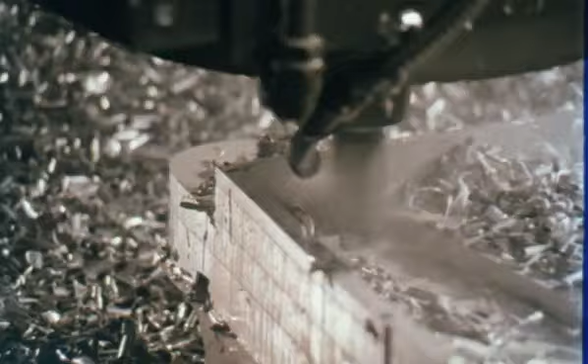Machines as a complement to man. Flying machines, drawing machines, machines to fashion metal with hand and with spirit. A constant dialogue between man and machine.

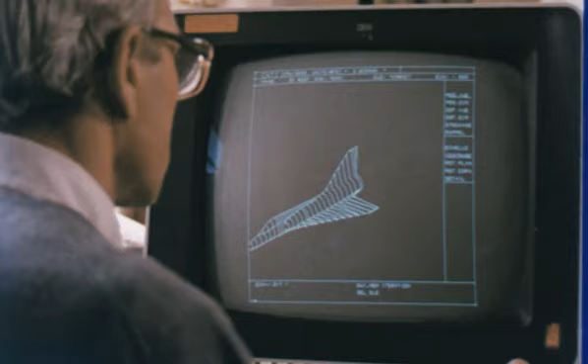A dialogue expressed at all levels through computer language, a language where the image is now integrated. Such is the language spoken at Dassault, the language of CAD/CAM, computer-aided design and manufacturing.

At Dassault, CAD/CAM first and foremost consists of men with their creative spirit, of computers with their processing memory capacity, of terminals, all of them just so many ears, eyes, and mouths for mutual understanding and common achievements.

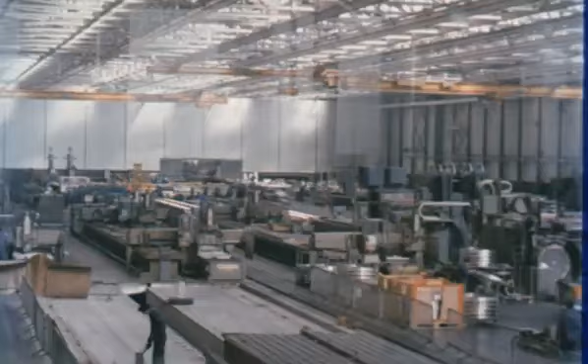At Dassault, CAD/CAM has 75 design stations in 7 factories, 500 people dialoguing with the computer, a system fully integrated within the industrial process. A reality which foreshadows future methods of production, from design in the engineering department to final quality control by way of tool definition and machining of parts from the simplest to the most complex.

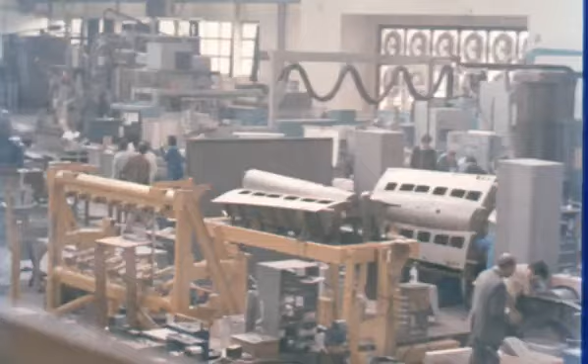CAD/CAM, a gateway to the future, which in fact started 15 years ago and which now, for the workers of Dassault, men and women, has become a daily reality.

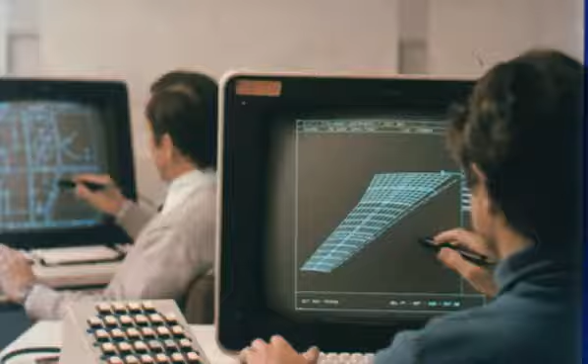Men and women fully confident in the system which is at the service of all, making for stepped-up productivity, efficiency, speed, precision, and dedication. A system which at all echelons gives them creativity for increased responsibilities.

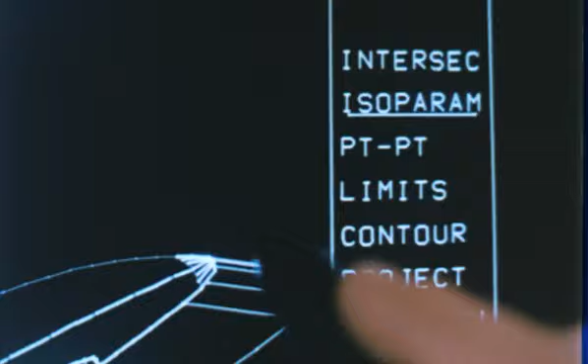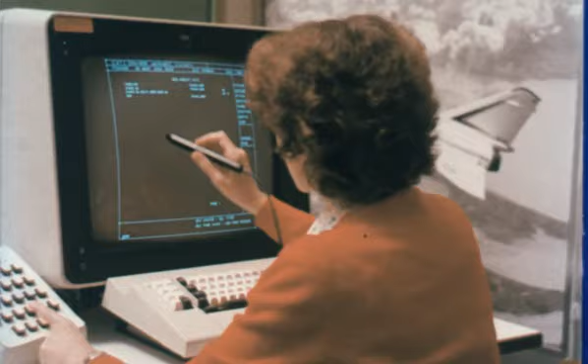In order to better understand the integration of CAD/CAM within Dassault, here's an abridged account of how an aircraft component is produced, namely the main structure of a Mirage 2000. With the overall definition of the aircraft known in the computer, the selected cut defines the shape of the structure.

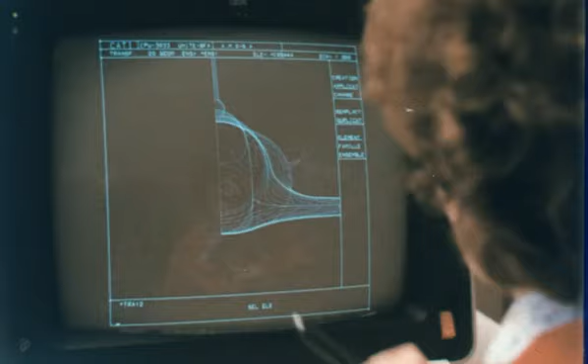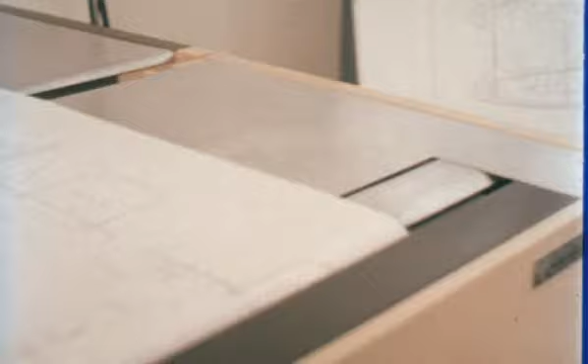The precise definition of the component takes place in the engineering department. For this type of operation, the graphic scope with its keyboard and light pen is at present being used more and more instead of the drawing table.

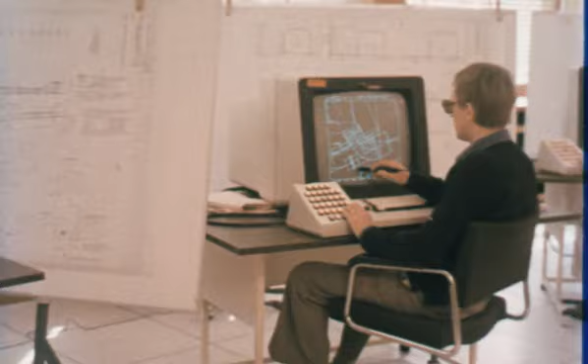This scope is but the window into the computer and its highly reliable memory, just so many elements which enhance man's decision-making possibilities.

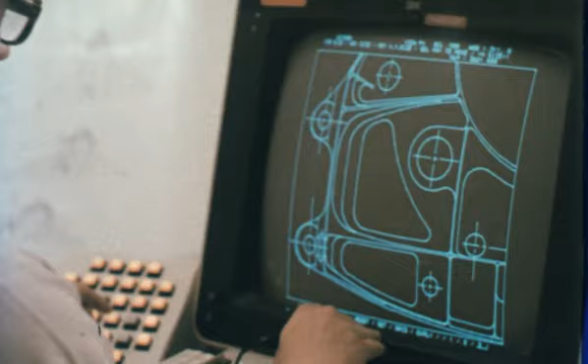Thus, the design engineer can devote himself entirely to the creation of the component which, before his very eyes, after ceaseless refining operations and readjustments, assumes its final shape to reconcile often diverging constraints, for instance, aerodynamics, performance, structural strength, aesthetics, comfort, etc. Rapidity and optimization of design that no other system can equal.

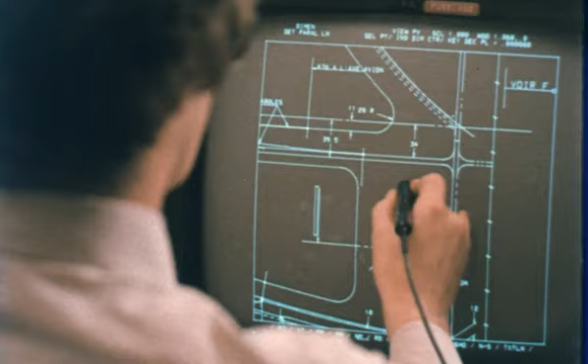Thus, by successive stages, the component is developed in its minutest details in the engineering department. The technical characteristics of the component are stored in the main memory of the computer in the form of design parameters by the engineers themselves.

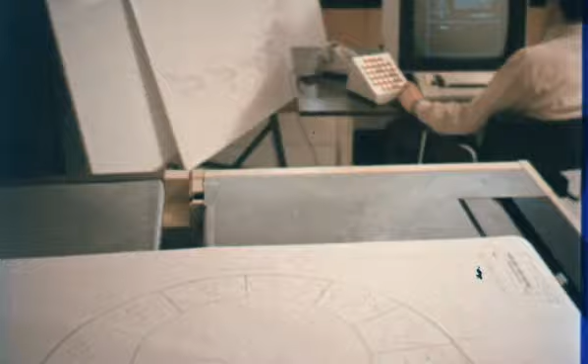Likewise, the engineering drawings of the aircraft are computer controlled and produced in just a few minutes. As the computers in the different sites are linked by a telephone network, processing and telecommunications are used to transmit the drawing to the production units.

The drawing is thus instantaneously transmitted by the engineering department computer to the factory computer for manufacture of the part. The computerized image received in the factory can again be displayed immediately on site.

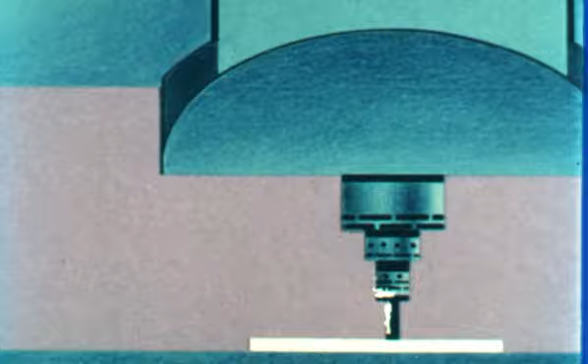The manufacturing engineer is in charge of developing the machining process of the component in the workshop computer. The data is then transmitted to the machine tool, which sculpts the shape designed in the engineering department in the metal.

This explains the presence and integration of CAD/CAM at all production levels.

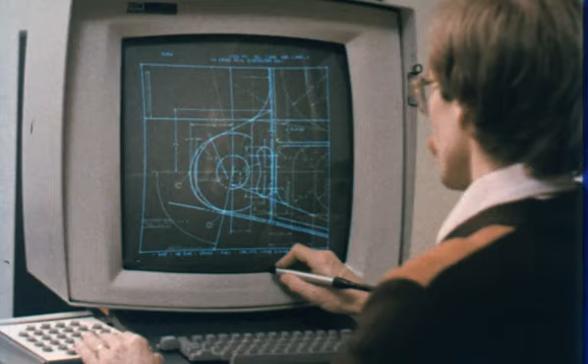CAD-CAM is a nervous system, the pattern of which can be seen from the very moment the drawing, prepared in the engineering department, is displayed on a design station in the factory. The manufacturing engineer modifies his drawing, preserving only the basic geometric shape of the component.

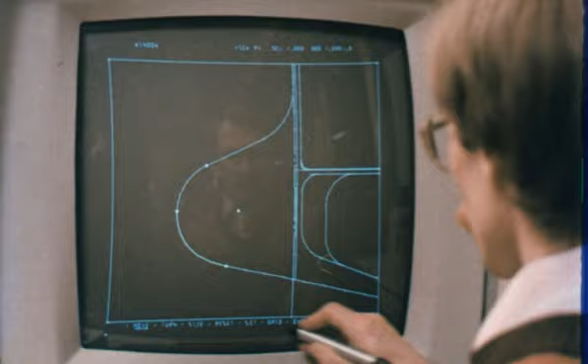Then he determines the shape of the cutting tool and its travel, indicating the successive surfaces of the component coming into contact with the tool. At this stage, CAD-CAM discloses its true role of production tool.

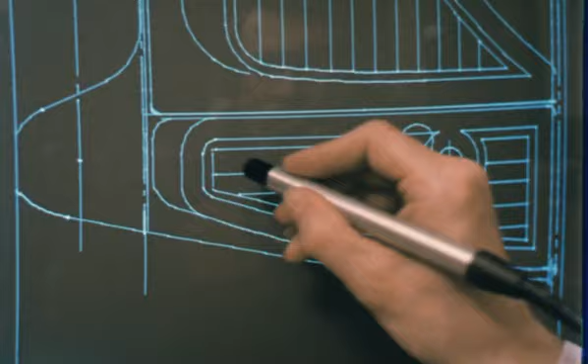For this particular part, several numerical control passes are necessary. First, a rough machine shape is executed on a 3-axis numerical machine tool. This programming process, with the actual motion of the proposed machining, is displayed on a scope.

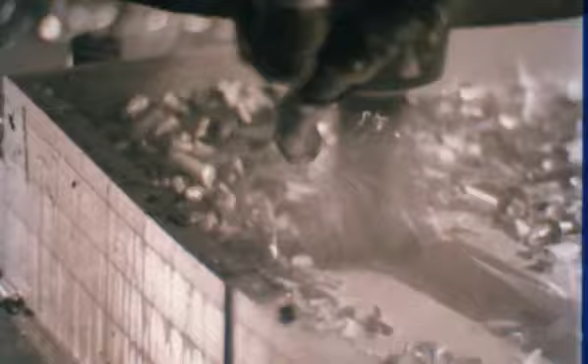And the computer again pilots the numerical control machine tool, which gives the component its preliminary shape. The programmer then works out a finishing pass, which will be effected on a 5-axis machine tool, which can reproduce the highly elaborate outline of the part.

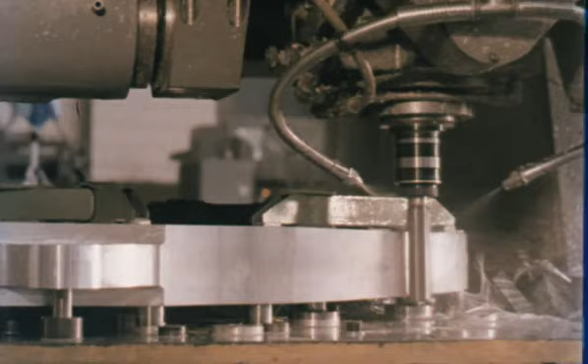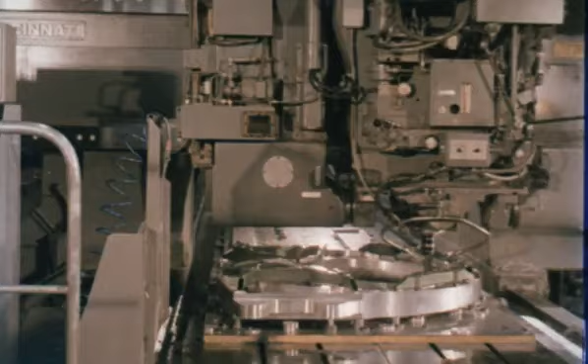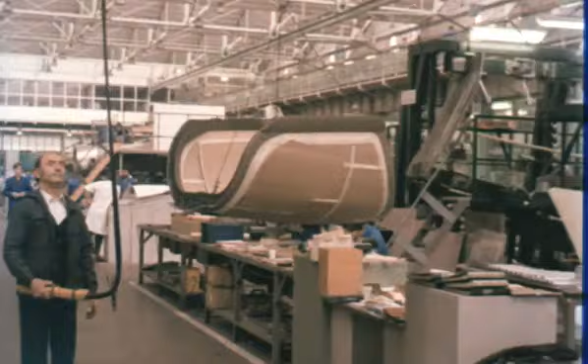At the end of the production line, the completed part is compared with the theoretical shape stored in the computer memory on a numerical control checking machine. When validated, the finished part is fitted on the plane.

Most parts and tools required for the construction of the Mirage 2000 are designed and built in the same way as the structure just described, a story in which CAD-CAM had a hand throughout.

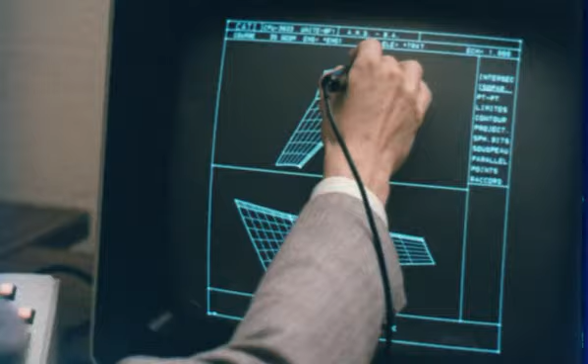With the new Catia computer language, a computer-aided three-dimensional interactive application, a higher degree of technology has been reached. This system, an all-around development by Dassault, definitely breaks away from the limitations of purely plane drawing. Catia uses high-efficiency algorithms to determine and optimize complex shapes.

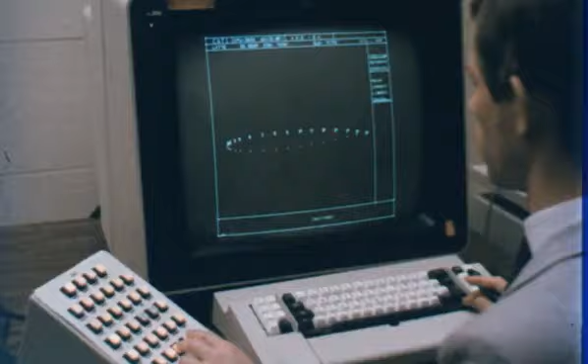In the case of a civilian aircraft horizontal stabilizer design, for instance, the design engineer develops the wing profile curve using the reference points obtained from aerodynamic calculations. Smoothness of the profile can be evaluated by visualization of the wing outline.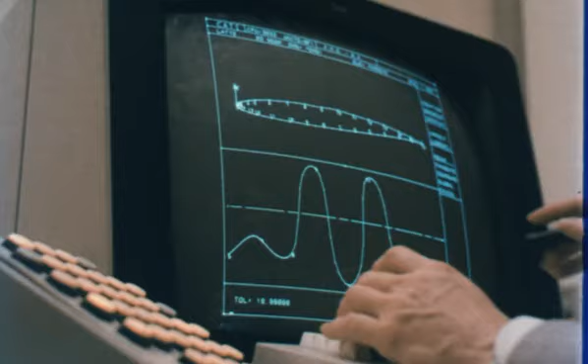Then the operator smooths out the curve with Catia, automatically optimizing its profile within given tolerances. Then the various profiles of the wing are positioned in space so that the design engineer can build the surface limited by these profiles.

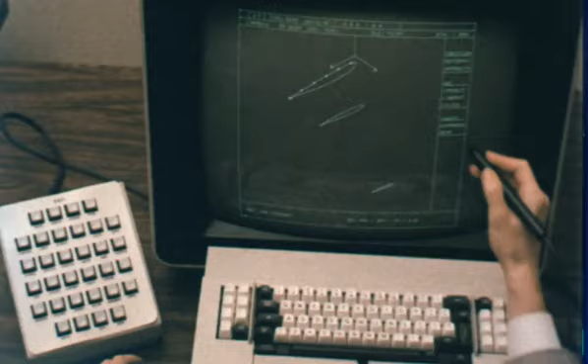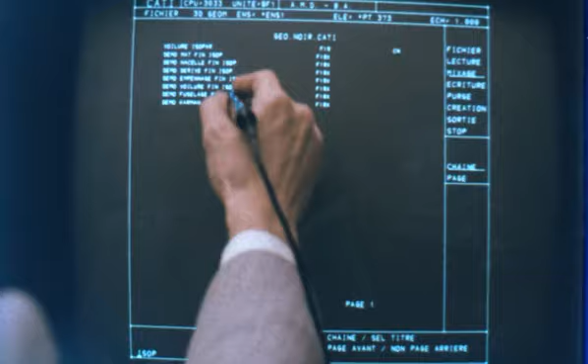Just as for the wings, all the other components of the future plane are stored in the Catia database, a fully integrated system at Dassault, and are always available for use by the designer.

The operator is now selecting the successive curves on which the wing surface rests, which is the upper face of the aircraft's vertical stabilizer.

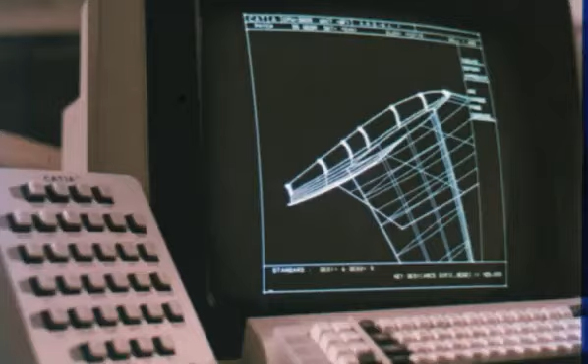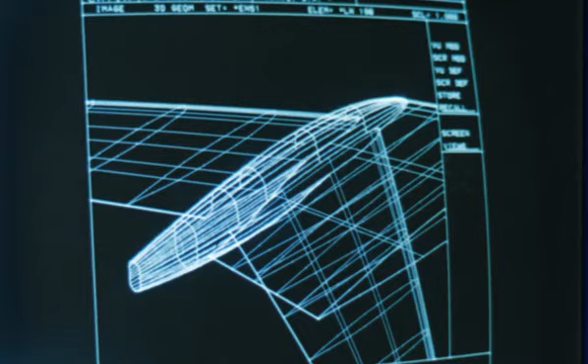The next stage of the whole process is creating by symmetry the complete wing definition. It is examined from different angles: the front, the upper face, the side, and finally rotation in space around the trailing edge of the vertical stabilizer.

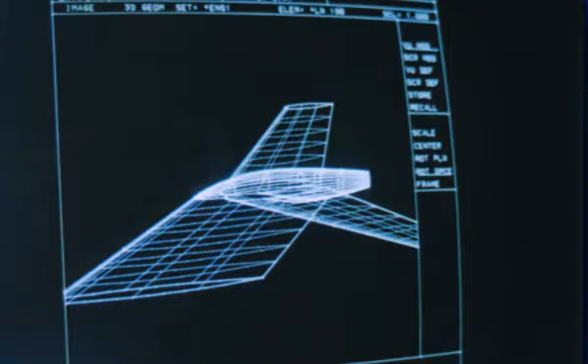Catia, an operational approach to shapes which considerably facilitates studies of theoretical aerodynamics. Catia, an operational approach to shapes defining machining of components, the shape of cutting tools, and necessary technological data.

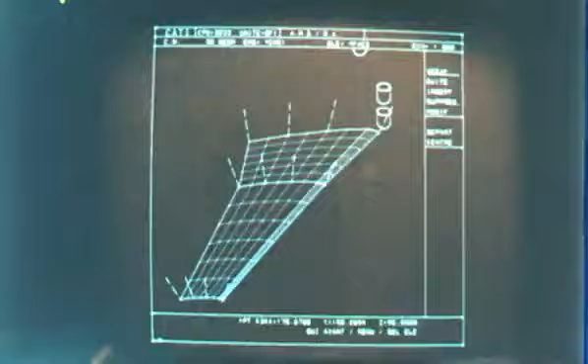The operator describes tool travel by selecting the surfaces where it must come into contact with the metal. On the screen, the successive positions of the contact point of the tool on the metal are displayed to check programming of the tooling operation.

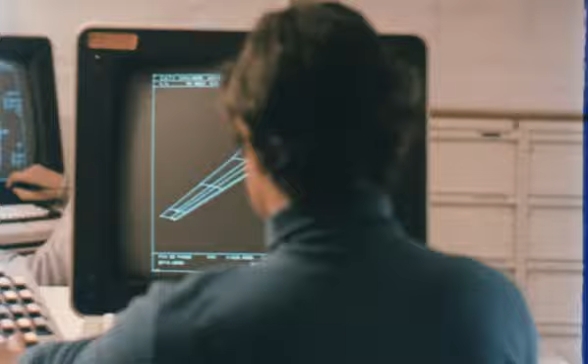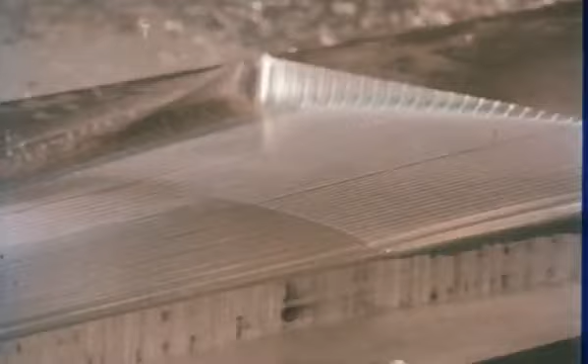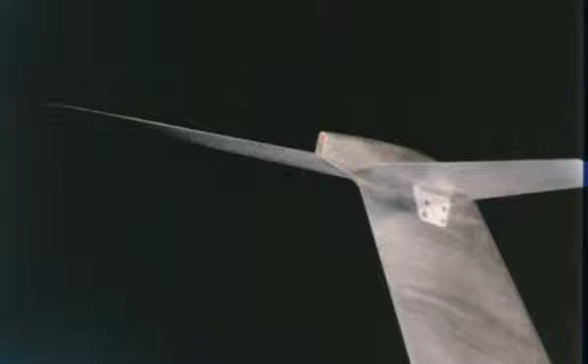The aircraft model is afterwards tested in a wind tunnel. Its shape is a faithful image of the original drawing.

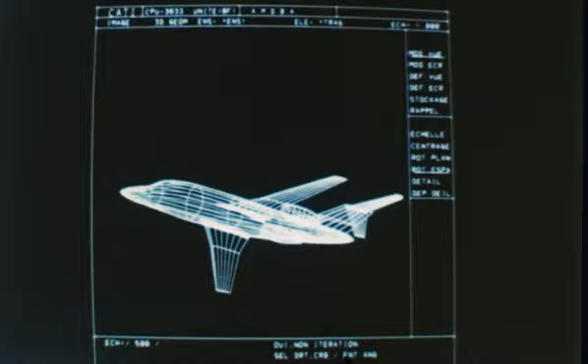Catia optimizes the definition of complex components, as for instance the Mirage F1 refueling probe, a device with very specific conditions of use.

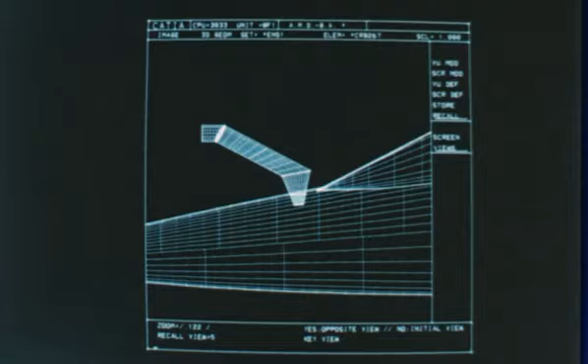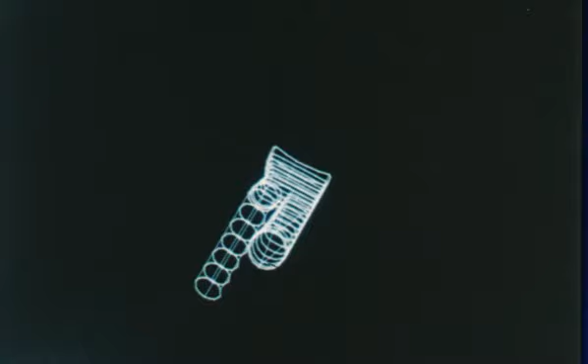Catia is the open door to all objects: this very complex fillet, this unusual pipe, this simple volume with a complicated plane section, this very sophisticated mechanism, this robot with optimized movements in space and time.

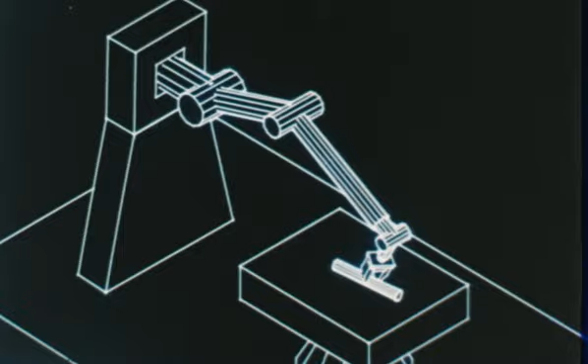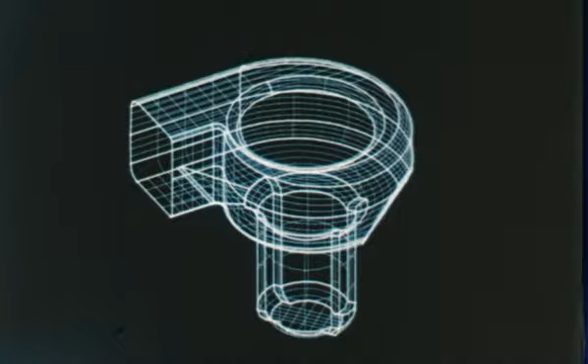Catia is also a designer, witness this telephone, an automotive engineer with this complex enclosure, a general mechanic with this connecting rod.

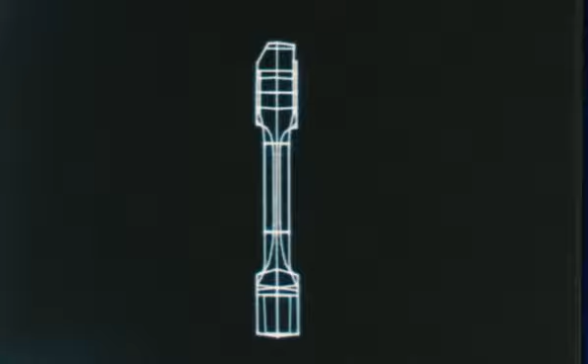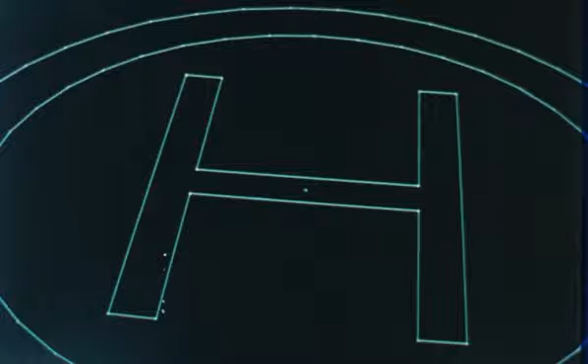But Catia also aims at further objectives, like offshore drilling platforms. Catia, a medical research tool with this artificial heart.

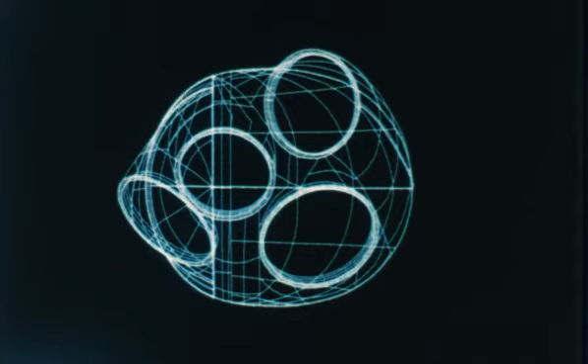Catia, architect and interior designer, making its way right into this house, highlighting its habitability.

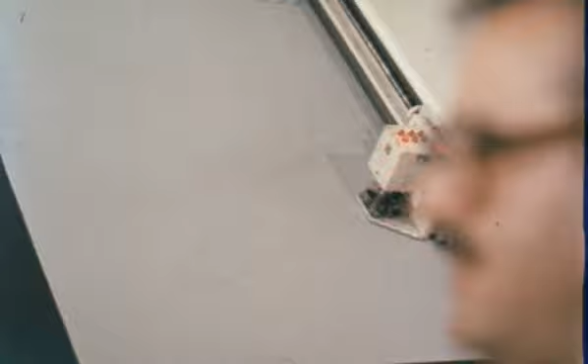Catia is the materialization, the emergent portion of Dassault's CAD/CAM integration, a time-saving technology reproducing the original technical concept with pinpoint fidelity at all stages of production. The precision of this system is second to none.

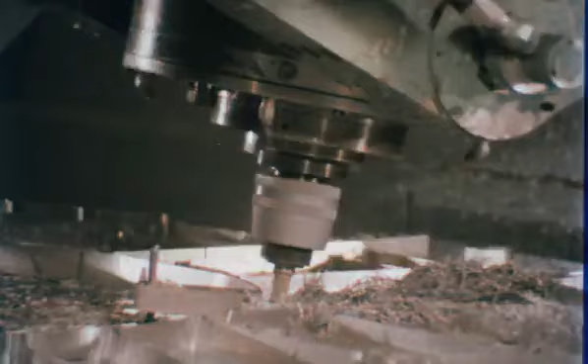A system which generates more competitive and higher performance products. A system which at Dassault's is already routine. A system catering to individual creativeness, individual responsibility, promoting man to a foremost place in the progression of industry.

CAD-CAM, a combination of decision-making aids launching Dassault towards future achievements.